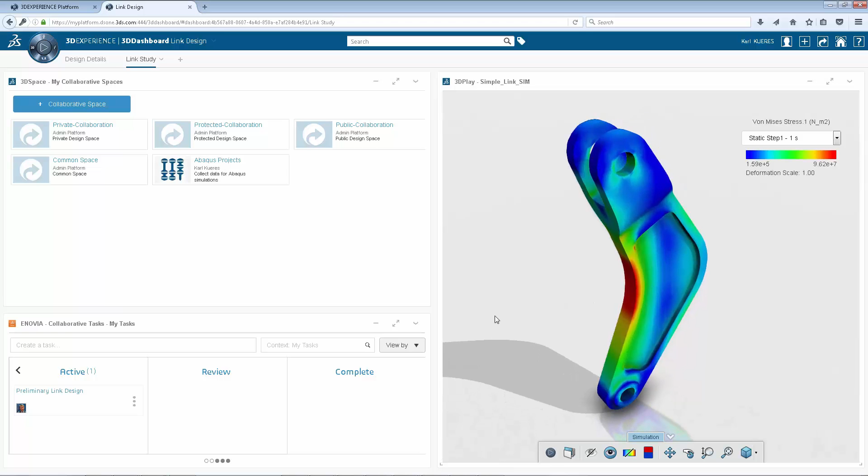In order to optimize the design of this link component, I will select some key parameters to be varied, drive automatic updates to these parameters, and study the effect on the product's behavior.

A common data model for design and simulation allows me to investigate changes to the design and the loading conditions and update the results automatically.

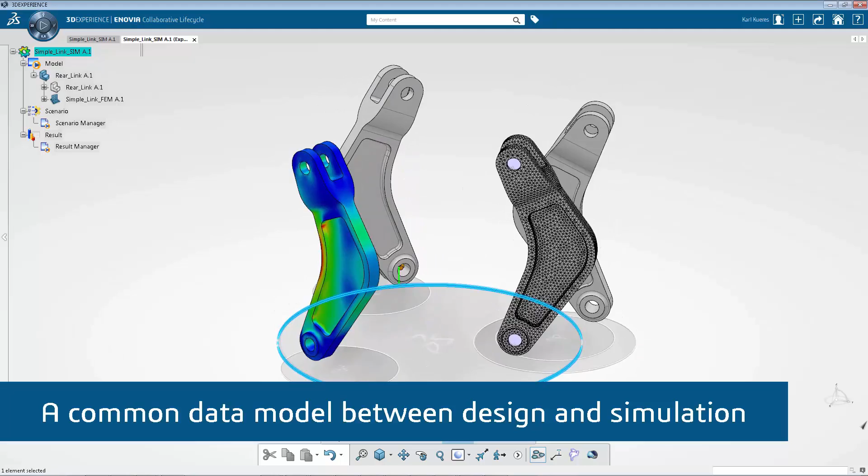The model container exposes all of the design parameters of the link component. For this example, I will investigate the effect of varying this pocket depth on the stiffness and strength of the part.

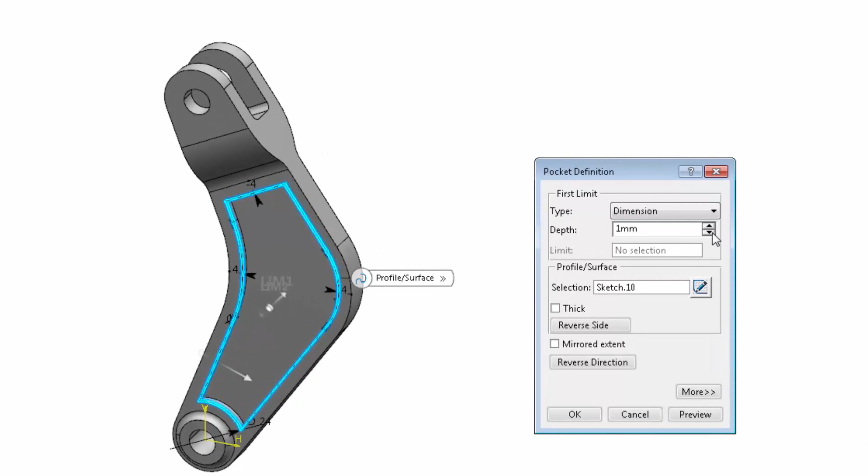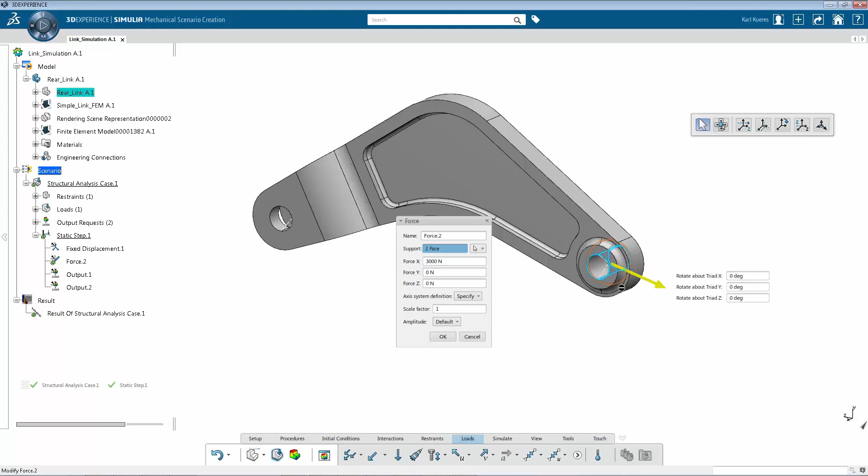The scenario container collects the loading and constraints required to describe a particular set of in-service conditions for the part. The design and the loading can be updated automatically to simulate many different load cases applied to many different designs efficiently. Through the result container, I can review the simulated response of the design to the applied loads and track any KPIs, such as the maximum stress and maximum displacement.

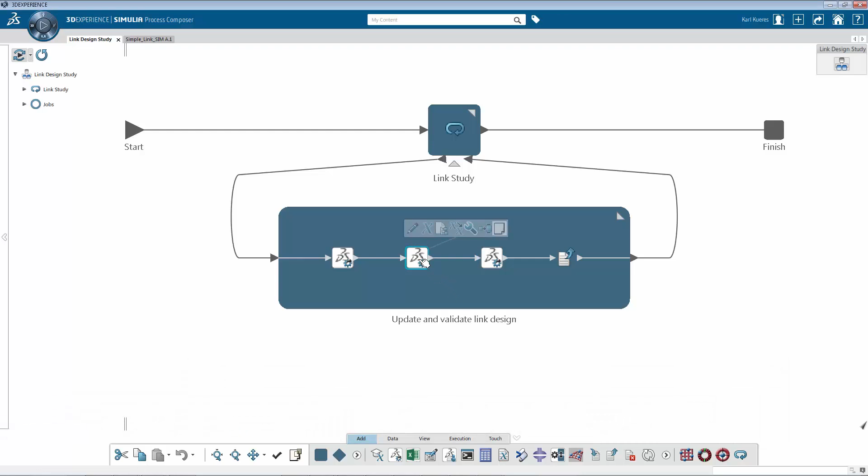A simulation process allows users to update design parameters and run a sequence of tasks automatically. The complete simulation data structure can be accessed and updated.

Updates to design and simulation parameters can be driven using a simple loop, a design of experiments, or an optimization case. This process will automate updates to the pocket depth.

Executing the simulation process runs all the requested design variants automatically.

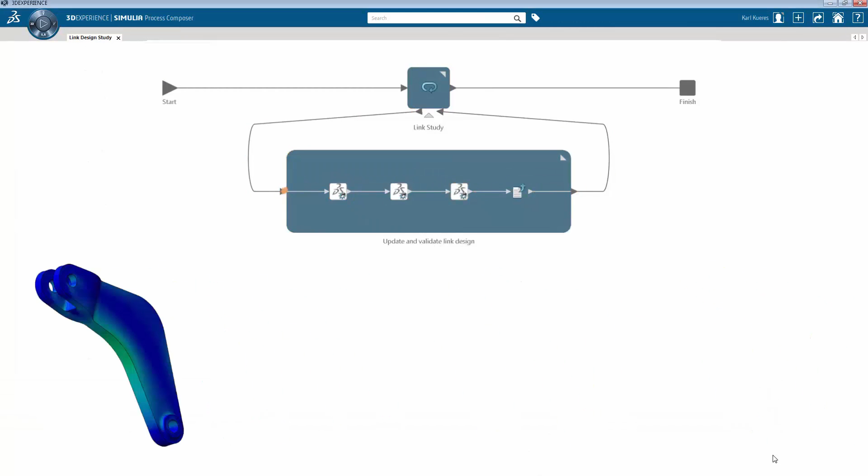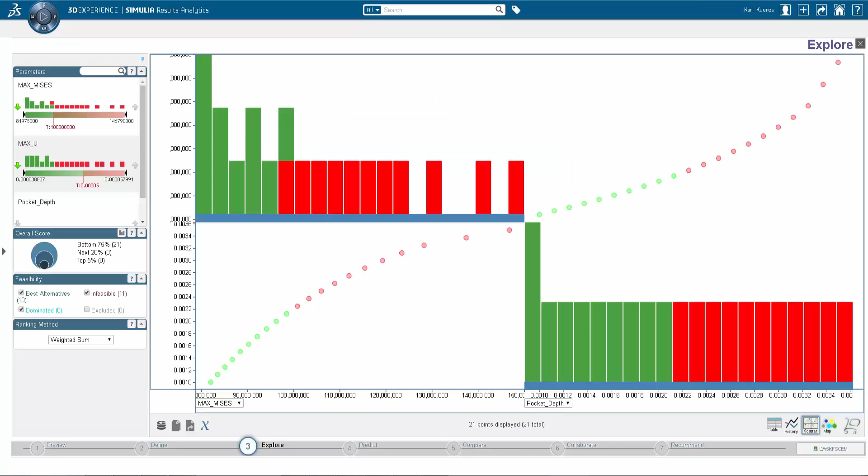The results of a simulation process can be explored to study the effects of parameter changes on the key design KPIs and to identify the optimum design.

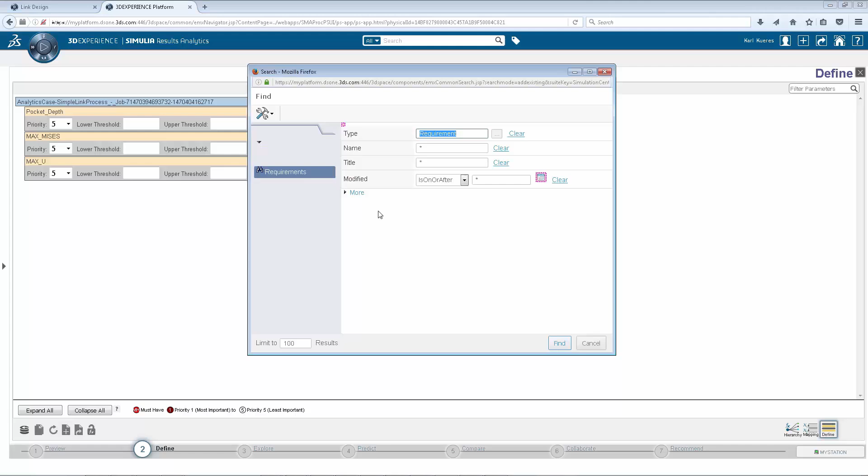I start by specifying the design requirements and objectives. In this case, I must limit the maximum stress and displacement whilst maximizing the pocket depth to reduce the weight of the link. If already defined, I can import the requirements from ENOVIA.

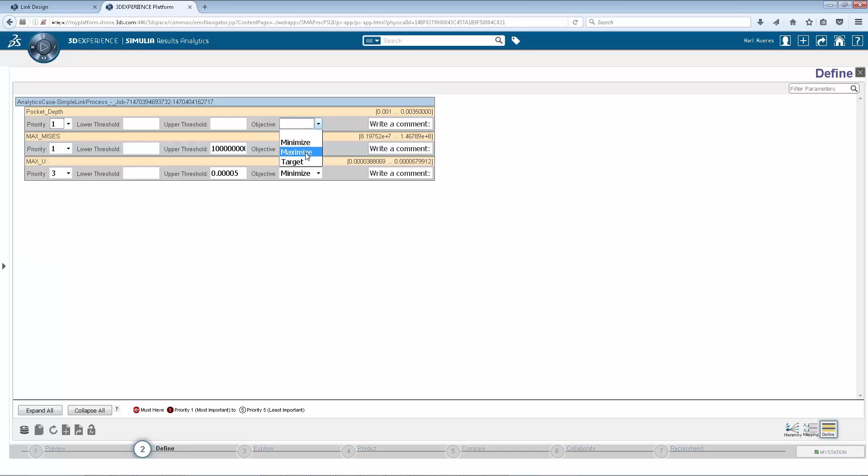Once the design objectives have been specified, I can explore the design points produced by the simulation process. The design points are automatically ranked based on design objectives.

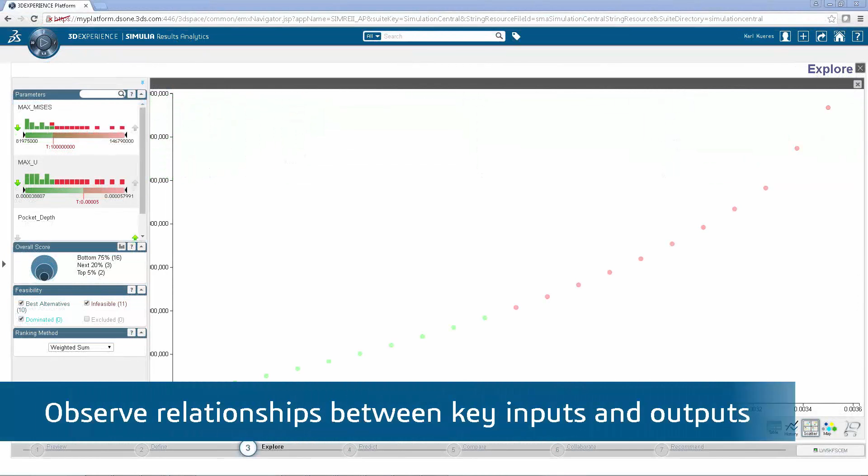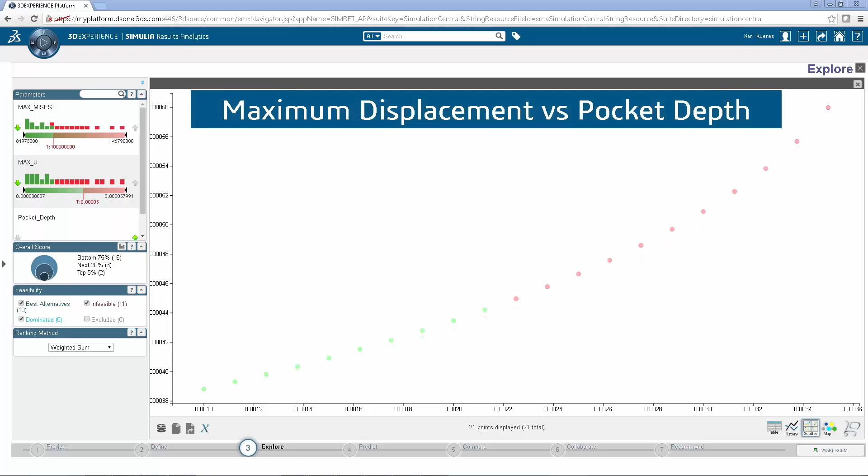To gain an understanding of how design changes affect the product performance, I can review plots to highlight any correlation between inputs and outputs. In this case, I can see how changes to the pocket depth affects the resulting maximum stress and the maximum displacement.

In addition, I can estimate the response of intermediate design points using approximation models.

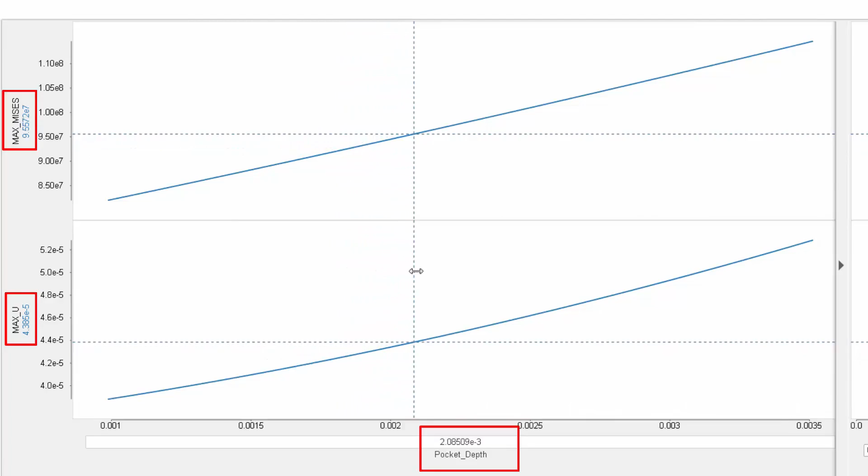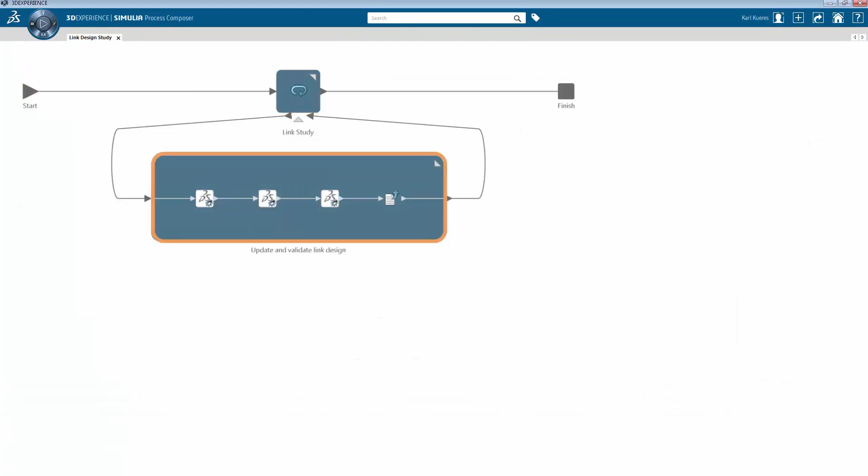In this simple example, I only varied a single design parameter. However, a simulation process can drive updates to any number of design parameters, allowing designers to simulate and explore large numbers of design alternatives.

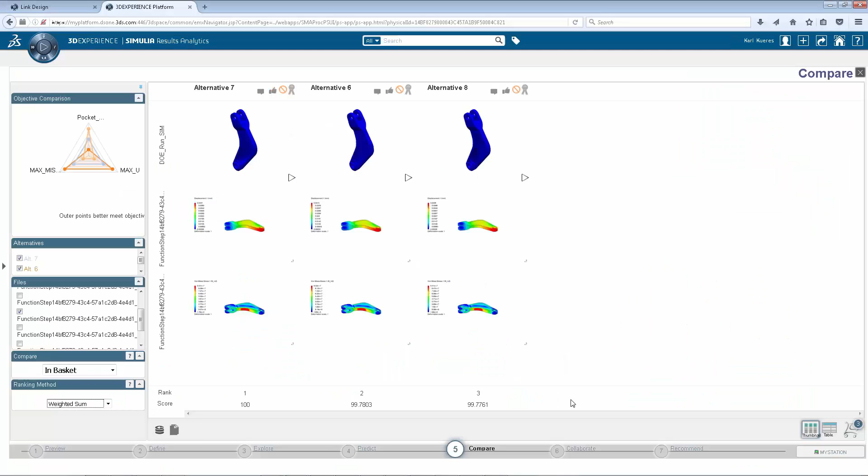Automating simulation of design updates allows designers to select the optimum design from a much richer set of alternatives. I can select a subset of design alternatives to perform a more detailed comparison and identify how well each fits to the design objectives.

Finally, I can select and record my recommended optimum design.

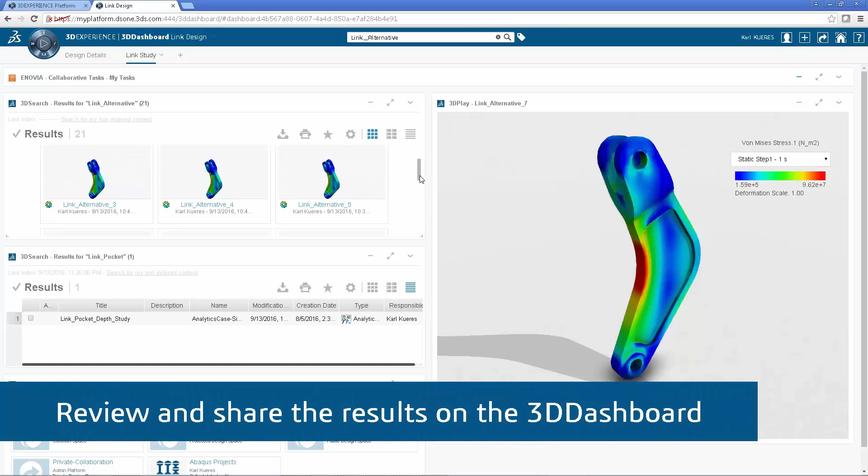Having completed the design optimization task, I can now share the results using 3DDashboard.

From the dashboard, I can link to my ENOVIA tasks, attach my working data, and mark my task as complete to notify the project team.